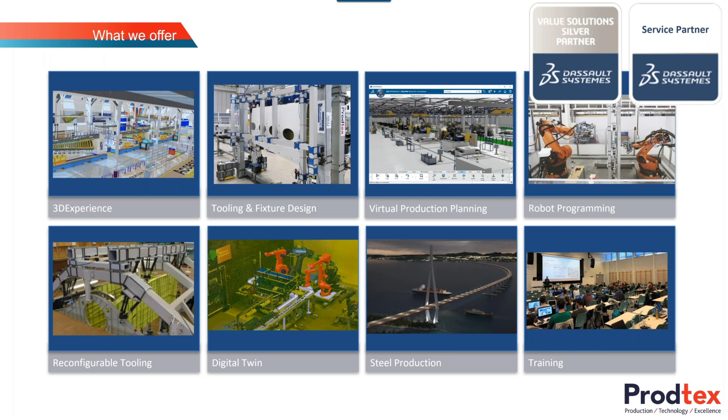You probably use a lot of emails to communicate. You might even send files via email sometimes. And when you want to show something, you create and prepare PowerPoints with screenshots. Some people might make a very nice database in a silo somewhere in the company which someone else cannot see, and so on. This is a classical, typical problem in an organization from my experience.

Today we have good solutions such as Teams, Skype, maybe Jira for the Kanban process. There's been a nice improvement for collaboration, but you see there is something missing, and that's to solve the daily work in the factory. It is to use Excel.

That's how you run the factory many times. Of course, everybody also has very advanced systems, but everybody knows how to work with Excel and is comfortable there. The thing is, what we're trying to do with the 3DEXPERIENCE platform is to connect all these roles together so that they communicate

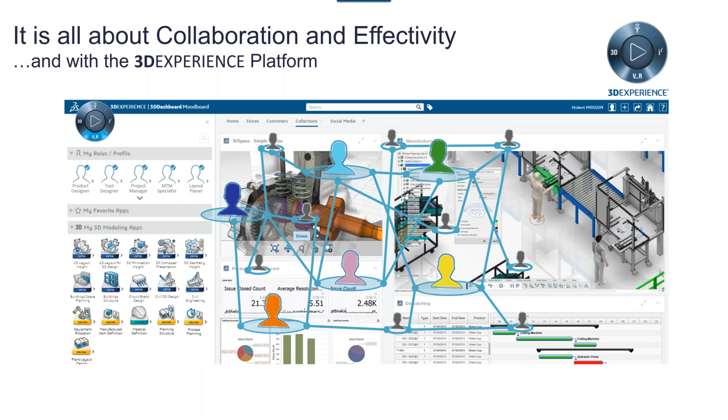So I will show you how this can look like in a process. What we're trying to do is move away from the static way of thinking, where information is kept in silos, and many times you lose information because you're running in a separate system and so on.

It's not evolutive. What we want to do is work live in one single source of data. It should be easy and feel nice to open up and see data. Everybody in the organization should be participating in 3D, so you should be able to view the actual development in 3D no matter what you do in the company.

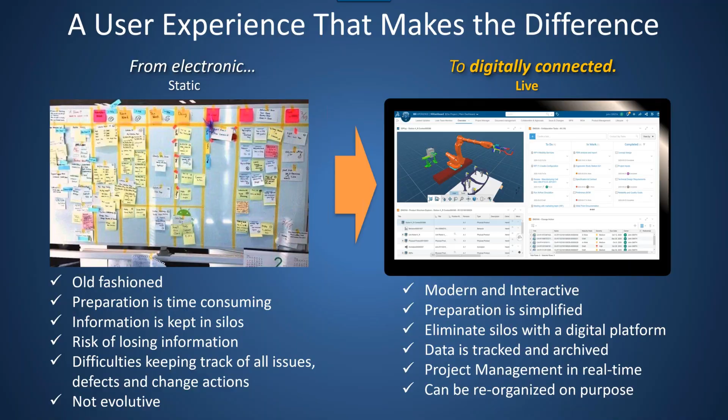You simply log into a web page and you can do everything there. So what we are striving for is to work in one source of truth, so that we can become even more effective.

Today we will focus on the design review process. What we want to do is set up a scenario where you are working in collaboration. We want to show how we can activate tasks, and how we can activate issues when we find a problem, and how we communicate with each other when doing this.

Working this way enables us to go from sequential engineering to concurrent engineering, where you can work in parallel because you share the data.

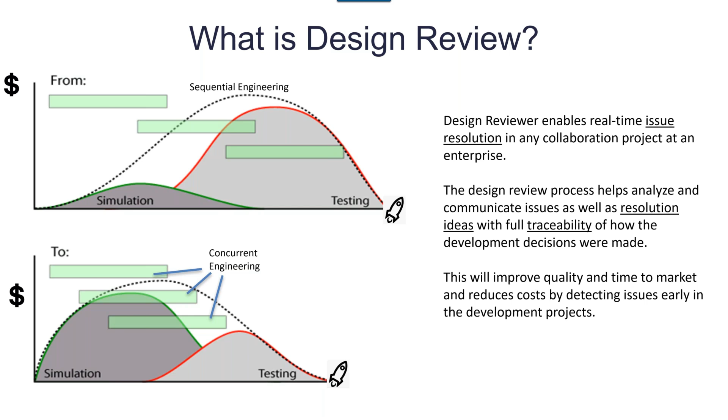What we're going to do is use simulation as much as possible when we're actually doing the development work instead of building physical prototypes and so on. So you can reduce the time, be quicker than your competition, and be cheaper if you want to, or earn more money. So this is why we do this, so to say.

John is a design leader, and eventually Eric and John will deliver this design to Sarah, who is their customer. So we will start with John. I will go back to this as we move through the process, so we can see where we are.

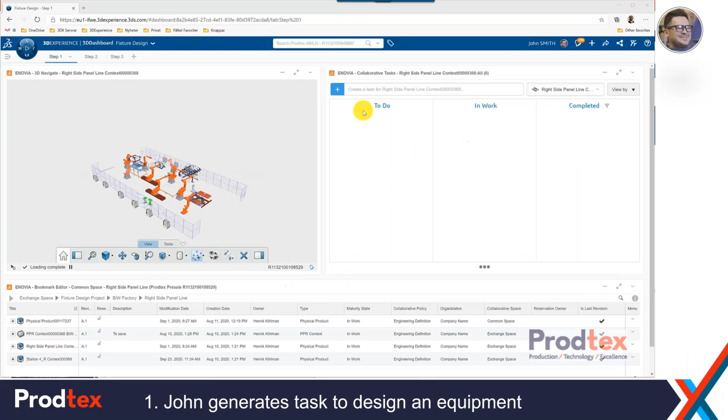John opens up this web page, which takes him to the dashboard that he has prepared. This dashboard is something that he shares with Eric. And in this case, you see, we can see perfectly everything in 3D.

It's very quick to load, even a factory scale level, into this web page here with different viewers. These features here, these rectangles, are called widgets. Here you have one widget which is called collaborative task.

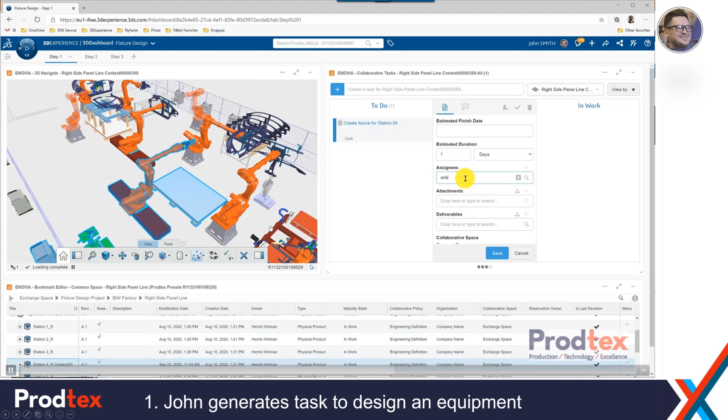He creates a task, which is basically to create the fixture, because this is just a white page, an empty space right now in station 4. In this case, you see there are not so many other activities. It should be many, but this right now is filtered on this line, so this side line for building this side of the car is filtered.

So we will only see these activities there, and this is the first one he makes. He assigns Eric to do the work, and in this case he is attaching the station for Eric, so Eric knows where the fixture will be.

And he saves this, and now it's in the to-do, and when John drags it into in-work, you can set the configuration of the system so that it sends away an email to Eric, so he knows, okay, I have something that I need to do. And that is the next step.

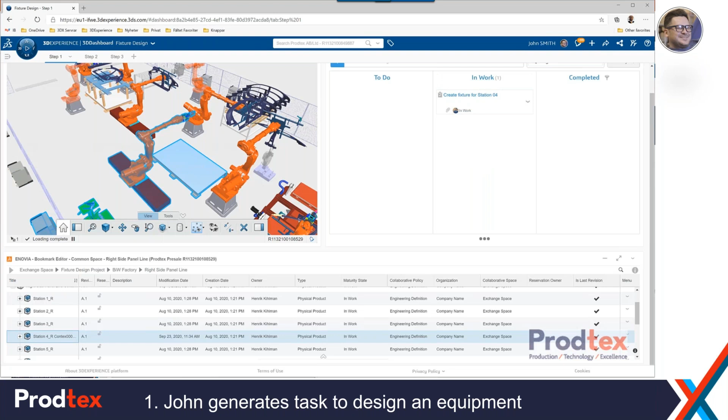So we're now done with creating this activity to design the fixture, and now we move on to number 2, which is Eric, who will design this fixture. We have set it up so he gets an email notification that there's something to do. Eric clicks on that link, which takes him into the same dashboard, where he sees that, okay, I have something to do, and he moves this into in-work status.

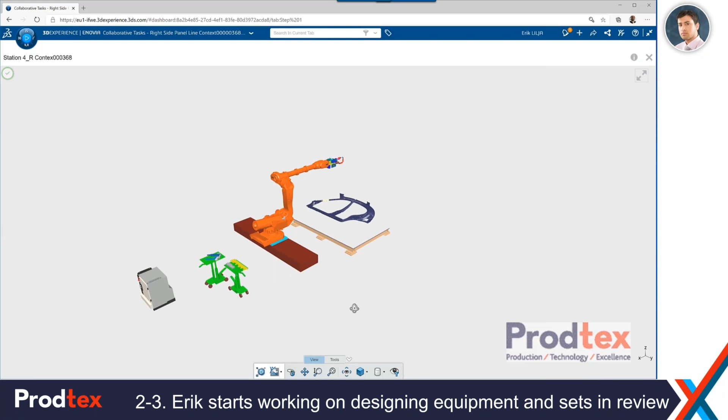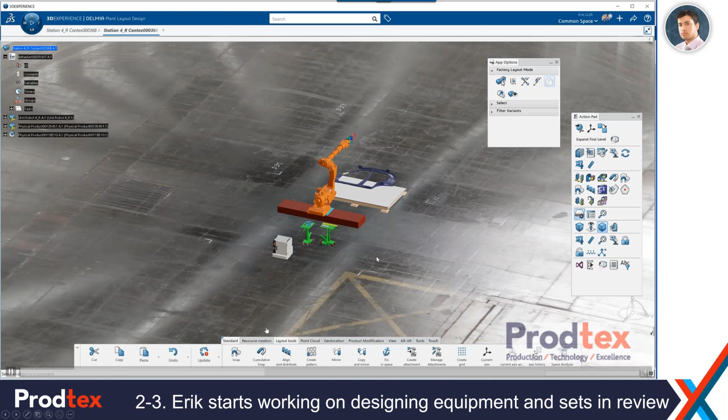So this activity has a life cycle. We have attached not just that, I added also afterwards a PDF. You can add any Word documents, or maybe a link to your team environment or something like that. Everything he needs in this case to solve this activity, to do this work, we can attach. And at the bottom here you also see there is a folder system where you can have more information if needed, but the attachment is to actually solve the task.

And you saw that he could right click on the attached data, and this is now opened up in the client, which is actually the software that is installed. This is no more a web page, this is the native software of 3DEXPERIENCE. In this case, you can see we're working in plant layout design, which is a layout app inside 3DEXPERIENCE. It could be CATIA or something else.

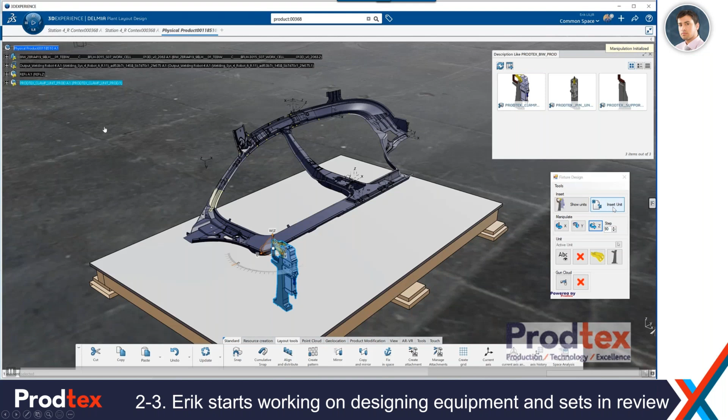I'm just showing a little bit that he brings in some body in white fixture modules. This could be any process, of course, in the design work. And this is the finished fixture in 3DEXPERIENCE. So Erik is now done with his activity.

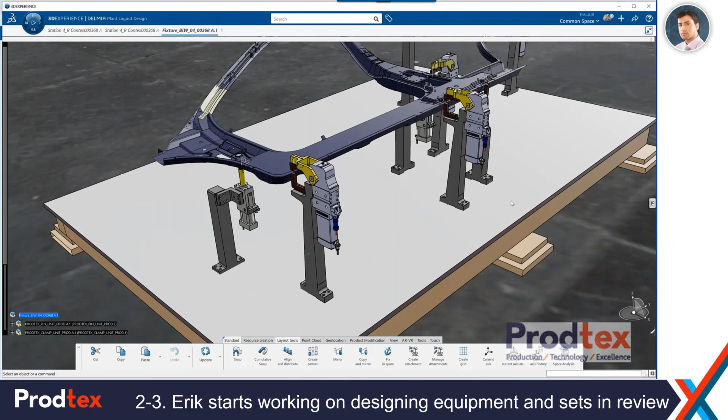So now he wants to tell John that, okay, I'm done, so can you please review my work internally? And I need to mention this, that this is a view that the customer doesn't see yet here. So now he's done and he puts it into approval, and if you set it up that way, there is an email going out to John. If you don't want to have emails, you can use this notification functionality instead in the platform. There are various ways to work with that.

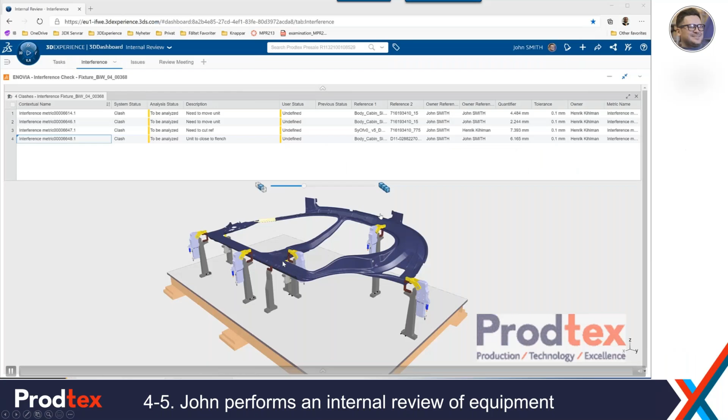It's now done, and we go into number 4. Before we go into this step, we have done a small step which I'm not showing here, which actually is to create a clash simulation. So that has been done. This is not done automatically, but I haven't time to show all those details.

But actually, after the clash analysis simulation is done, John works on the web page again, the dashboard, so he doesn't have to have the native client installed to actually do this work here. In this case, from one clash entity, he generates now an issue, and he assigns Erik to solve this issue because he found one clash there.

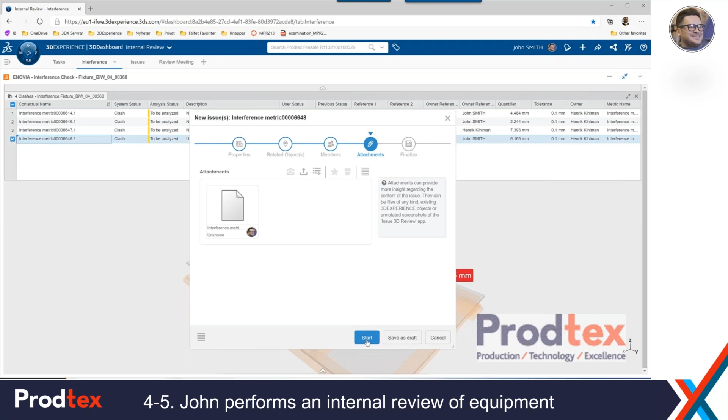In his review work, he can add screenshots or other documents into this issue if needed. And once he says start, that means this activity is now started. And that means, in fact, that Erik will get a notification that there is an issue. And that is where we are now.

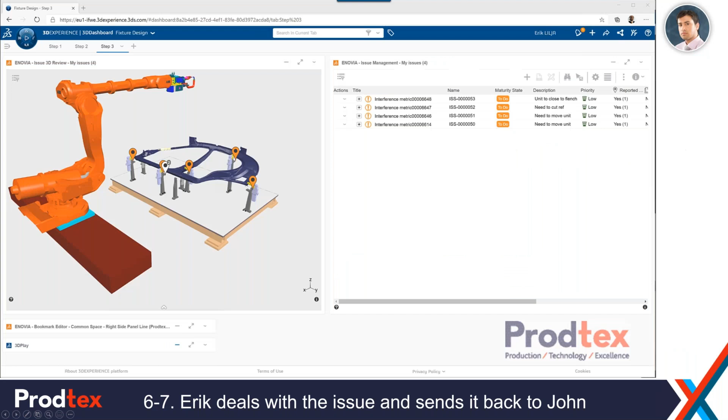We've done number 5, so we're going into number 6. So we're going back to Erik again, and he needs to solve this issue because now we are in this issue domain, so to say, where we have our internal review in the company. Erik opens up the same dashboard, but a different tab here in the dashboard, and he can see instantly all these issues in 3D that he is to work with.

And you can see different colors for different status. In this case, the orange color is the to-dos. He starts by putting this issue into in-work status. And there again is the fixture, and he opens it up from the dashboard, opening up the native client again. In this case, it's a product structure design app.

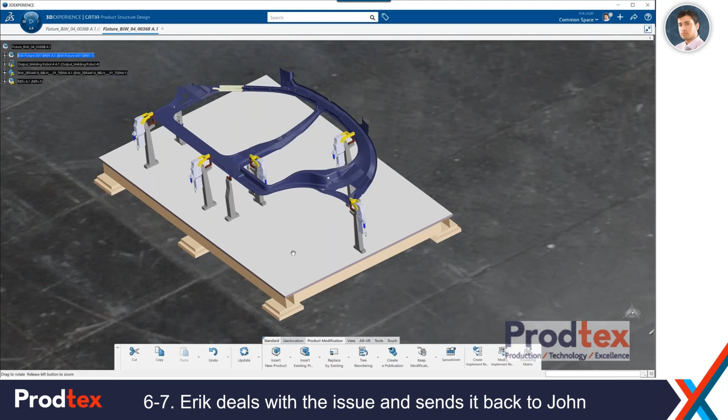And I make something very quickly here. Maybe there will be more analytic work going on there to move it, but I just moved it with the compass.

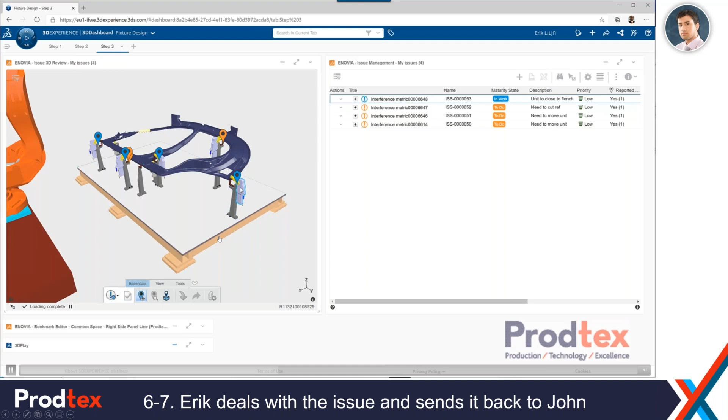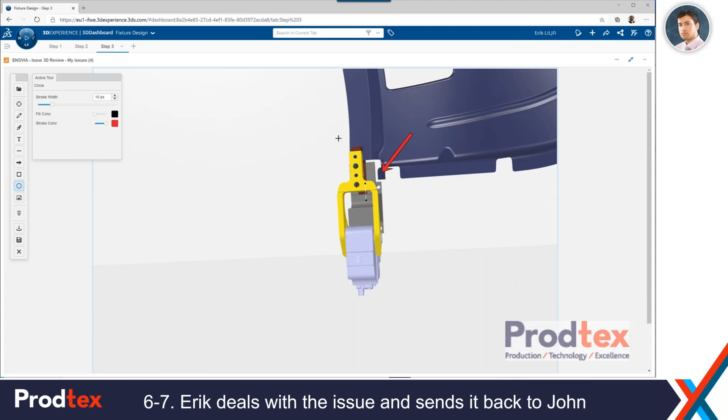He wants to, you can see that he can interact with the issues in 3D if he likes, because it's a really nice summary of what I need to do on this station and this fixture. And in this case he wants to clarify, because maybe John has a lot of different things to do, so he doesn't take for granted that he remembers everything. So he makes a small DMU graphic here to clarify what he has done actually. There are a lot of nice features here to create graphics to clarify.

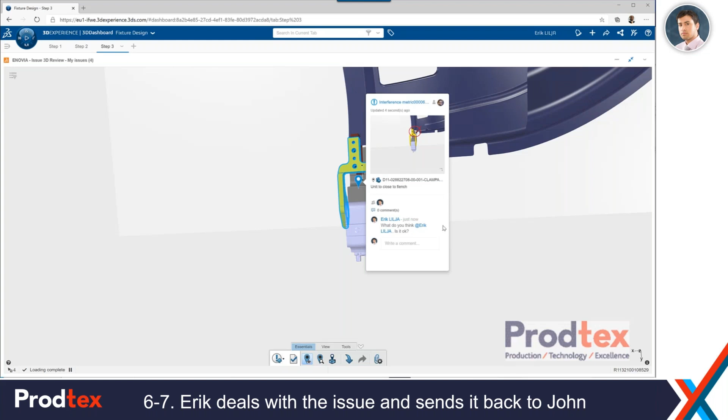And directly here you can also make a shot, and this is a very nice feature because sometimes you can use this as a sign-off so that you can have the history. So when you go back in a few years or whatever in the future, you can see the correspondence on this. You don't have to go through your email in Outlook to see what we agreed on. It's actually stored here on the issue, the complete history.

And Erik now moves this to what he thinks is completed status. So he's done the work. And now when we move on to John again, he's not in his office because now he needs to accept this issue.

And to be very effective, we cannot wait until tomorrow because this is actually in a hurry. So John gets an email when he's on the bus or whatever, and he doesn't have the laptop with him, but he has his phone. So what he actually does is open up the same dashboard which is now formatted for an iPhone in this case.

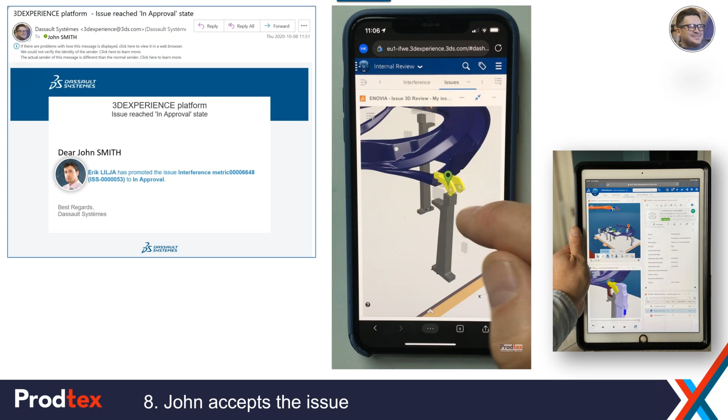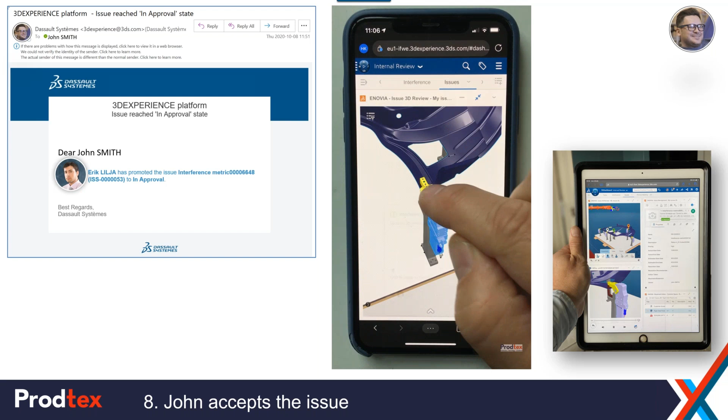And he can see exactly the same stuff that Erik saw, with all the exact same functionalities available. And he sees that this one needs to be reviewed and approved by John again.

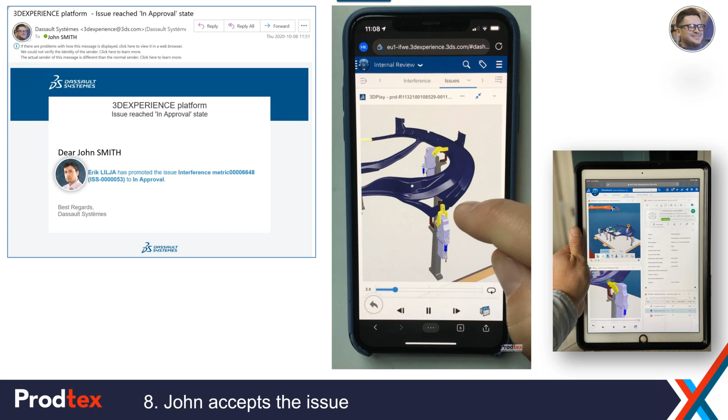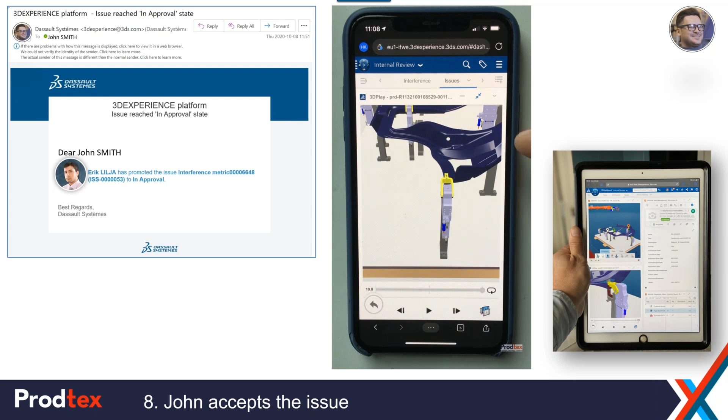So actually I didn't show you that, but in addition you can actually create simulations. In this case, Erik also created a simulation on the kinematics, how this clamp is moving relative to, so there is no clash in the movement and so on. So you can add a lot of different types of animations. So that was not a movie, that was an animation in the 3D.

So you can pause and so on and rotate. So it's not an AVI, don't get confused with that.

And he's on the run here, so he writes back that he's happy. So we remember that it was approved even here. So this can be used in a very flexible way, the way you prefer. So we just play around here and do a chat dialogue here. Of course, this can also be done.

I took a screenshot on my iPad Pro here with a very nice padding here, so I can drop it on the floor, or it can handle water or whatever. So you can have it on the workshop floor. And in that case, it's very similar to having it working on the desktop, because it's a big screen.

And you see and can do exactly the same stuff that you can do on the desktop with full 3D, and it runs really smoothly also on this. So that can be very nice. Maybe if someone wants to use it for work instructions or whatever on the workshop floor, there's a lot of nice features for that. Okay, so now we are done internally.

In this case, we want to continue, and John is now going to invite Sarah for a team review meeting on the customer site. And in this case, he filters out, first of all, the line again, so you see all the activities on the line, and now he creates a task, an activity to invite Sarah. And there's a lot of nice functionality to allow Sarah to see this data.

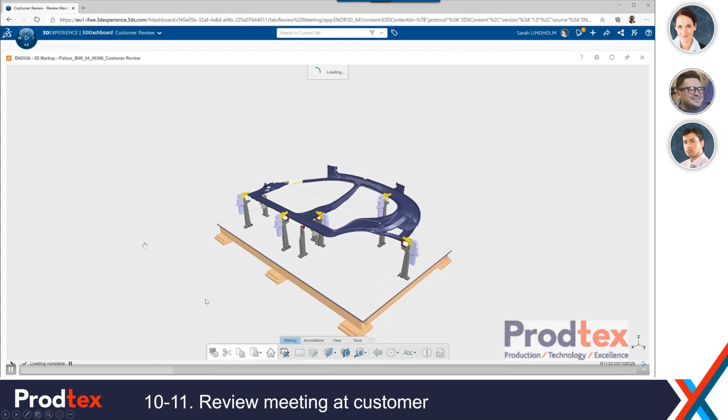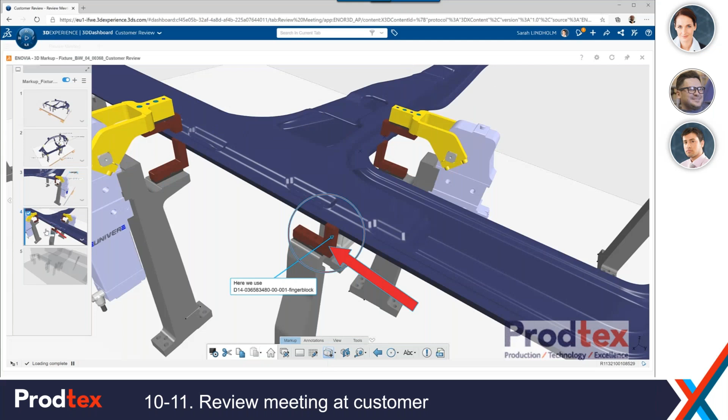It is very similar to PowerPoint, but in this case it's not screenshots, it's actually the real-time data from the single source once again. So this is live data. We can create nice slides with a lot of different graphics and text, and you can show 3D annotations such as drawing items, measures and stuff from a 3D drawing.

So you can do a lot of nice things here. In this case, she's not happy. She does not prefer the Univer, she wants them to use another brand. So she actually creates an issue directly from this PowerPoint-like app, which is called 3D Markup, in the meeting.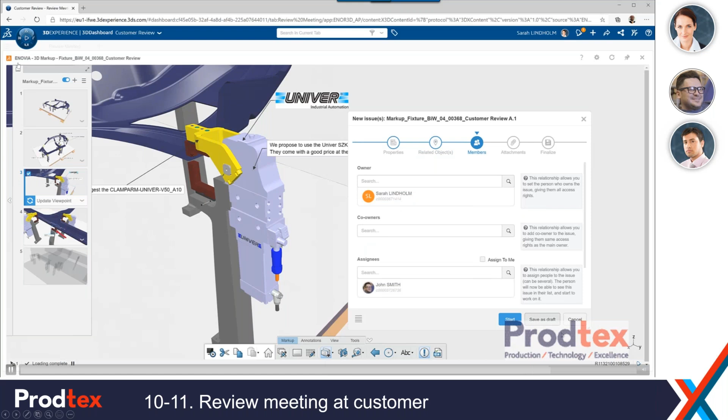So when John gets back home, he will open his email or whatever we set it up. It can be, as once again, notifications on the dashboard directly, so he doesn't have to make a separate documentation on this review meeting.

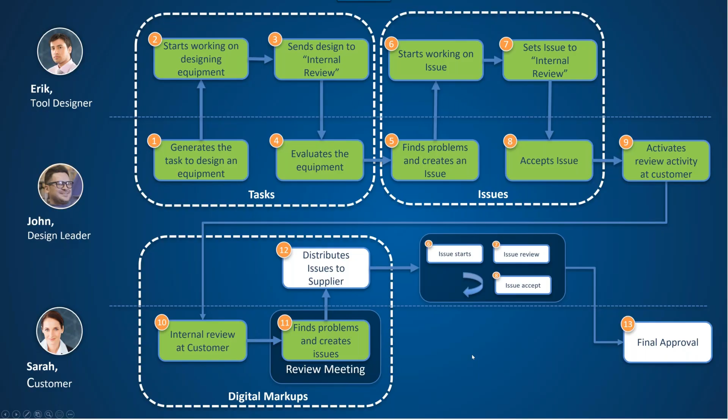And he gets back home and sees his email, and there might be some iterative work here. There is nothing called a final review meeting - it's basically when it's done, it's approved. So there can be some cycles going on both with the customer but also internally until we make the final approval, so to say. So John gets back home and, okay, there is an email or whatever we want to do about that to deal with this issue.

Okay, what I didn't show in this demonstration is one very important topic. Many times you have project leaders also working with a more holistic perspective in the design process. So there is a lot of nice functionality. Sometimes we say it by a joke that it's like having a Microsoft Project integrated into your development environment. And that's true, but I would say it's an even more capable functionality than that.

So in this case, you can look on different perspectives of your project. You can have an overview of all your issues. You can have the classical Gantt chart or looking on your employees and so on and what's going on. I didn't show that because it was too many steps to go through, but I hope you can understand that there is a lot of nice features for that as well.

So in summary, what I've shown is basically dashboards is the key to collaboration. And I would like to mention that dashboard has a lot of other nice purposes. When I'm working in the native client, so to say, I can use the dashboard on the side to administer data, search for data, and so on. So you can use that for a lot of nice features, but especially some OEM customers that we have been working with 3DEXPERIENCE.